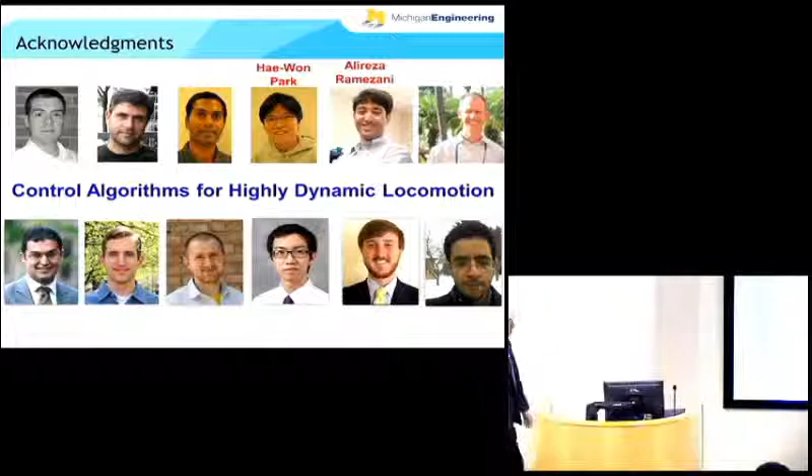Now I want to thank my team. Two of the members that have graduated and got on to great things are here, Ali and Hae-Won. So one of the great things about being in a fabulous Big Ten school, whether it's Illinois or Michigan, we're always arguing back and forth, is the quality of the students that show up. And it's seen here in the group in CSL for sure. But I also want to thank Jonathan Hurst, who's been a very close collaborator of mine. I started working with him when he was a PhD student at Carnegie Mellon. He's been designing robots.

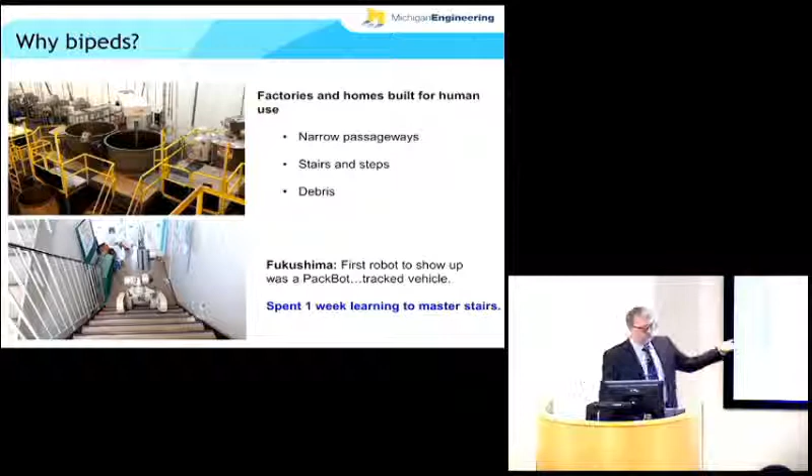Okay, so just a few quick comments on why do we care about robots. Normally you don't have to say anything, we just do robots because everybody loves robots. But in terms of bipeds, I get asked a lot why don't we just use a quadrupedal robot to go into a factory or a house? Why send bipeds? Quadrupeds don't fall down near as much as a biped. Well, the problem is our homes and factories are built for upright, narrow machines, organic or not. So either we redesign all the factories such that something like Big Dog could go up the stairs, or we have to make our robots stable enough that they can operate in that environment. When Fukushima happened, it was an American robot that showed up one week after the disaster, and it took them one additional week to train the robot to go upstairs. So that's not acceptable. We want them in our homes, and of course we wouldn't want tracked robots going in many places in our homes.

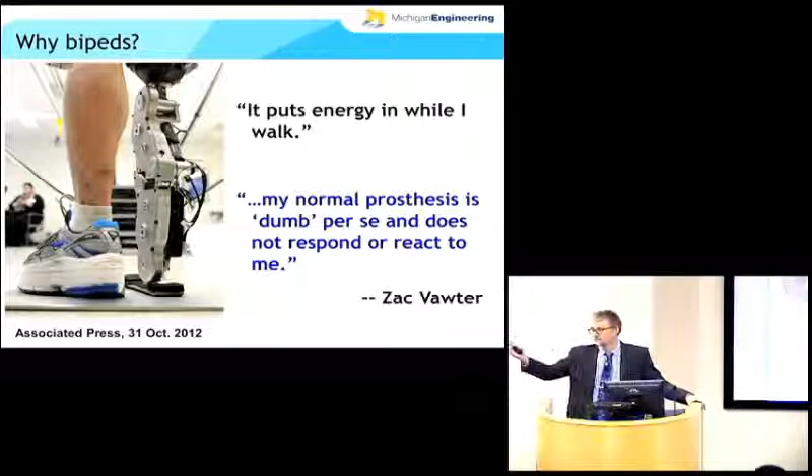If you've had the misfortune of an accident, you don't want to replace that with a wheel, so you're going to have a lower limb prosthetic, and they are now just as advanced as any leg on any robot. And then finally, I've proven lots of theorems in my life. I see lots of people in this room who've had that pleasure as well. And nobody comes knocking on your door and says, I want a tour of your latest proof, okay? What they want is a tour of the robot lab, and it's really a lot of fun. So that's why we do it.

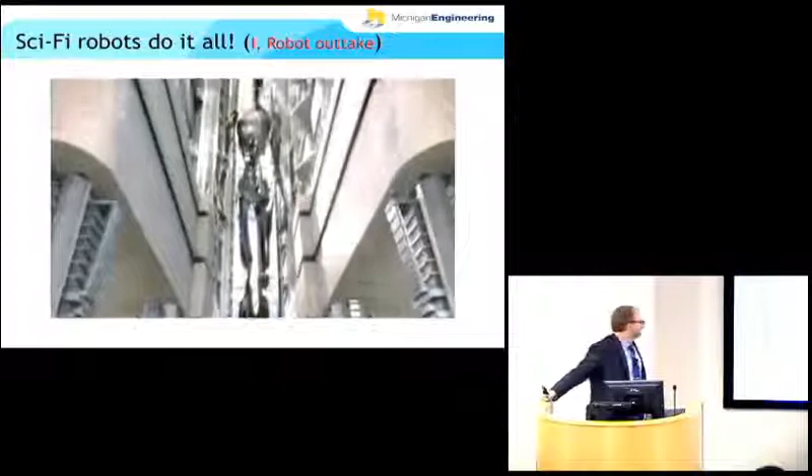Okay, so I had this funny title, Science Fiction to Science Fact. So let's just look at the state of the art. What do I deal with when people come to my lab? What are their expectations? It's based on TV, right? And these science fiction robots are better than people, better than anything you can imagine yet getting a machine to do. So what's the reality?

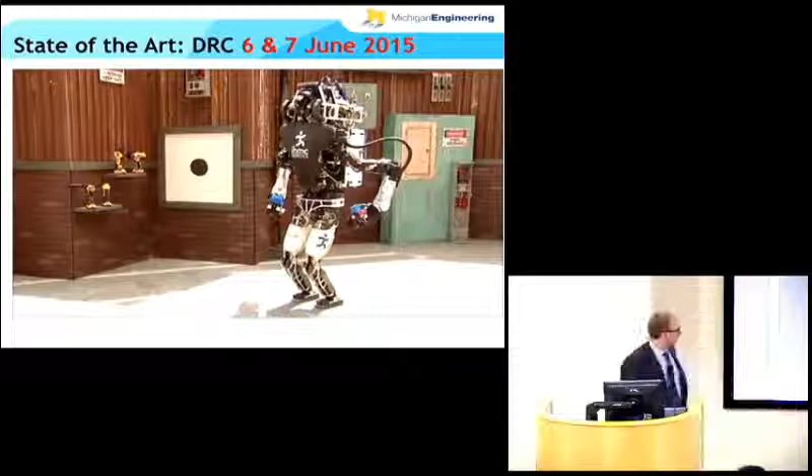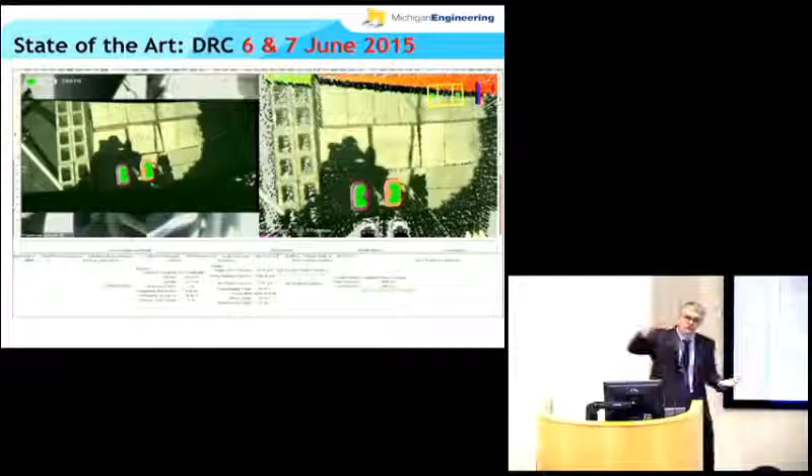So this is a DARPA Robotics Challenge. Why are you guys laughing? That robot won $1 million. Nobody here wants a check for $1 million? It's the only robot that had no wheels or tracks on it at all that actually won money. So it's the only true biped. But you can see it's still very clumsy. Literally, in Jerry Pratt's group, humans were deciding where the robot put its feet when going over these obstacles, okay? So the robot's not doing any of the planning. It's like the Wizard of Oz - you pull back the curtain, and that's what's going on. And how's that going to work out for you, big boy?

Not so well. So obviously he did much better on Sunday, and that's when the robot won $1 million, came in second place. Very impressive.

Was it on the same base ground? Yeah. They practiced on Friday with nobody watching, and then they did the competition twice, and you got to take your highest score. That's how it worked, that was the scoring rules. So they learned a lot on Saturday, apparently, and Sunday did much, much better.

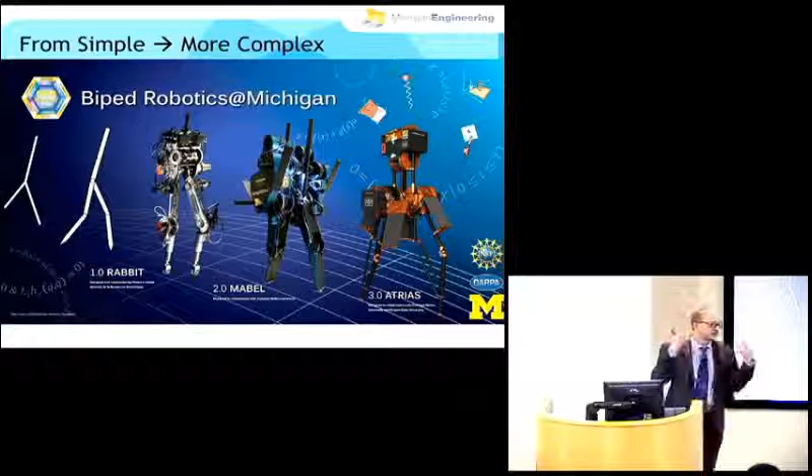So these are robots I've been working on. They're not nearly as sophisticated as that humanoid, but in some sense they're much, much better for doing science. I started just drawing down very simple models, doing nothing but theory until this French robot Rabbit was built. And then we went on and got robots in our own lab. But what I've always been focusing on is trying to get dynamic locomotion, things that move fast and respond well to disturbances.

So here's Rabbit. This is really old stuff now, this is like 2003. But it's carrying a weight that's not modeled, handling disturbances in a reasonable way. Rabbit was a gold mine for proving theorems and developing fundamental notions of locomotion. It's because it was simple enough that you could start making progress. If I had started with something like I'm working on now, quite frankly, I would have just given up.

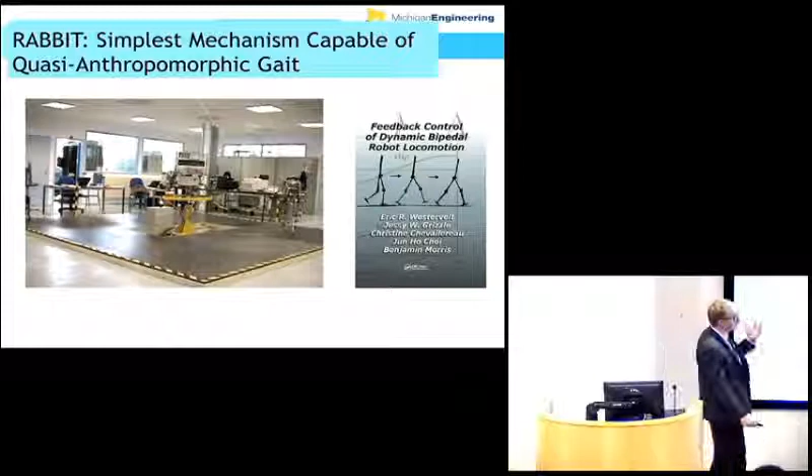It's just too hard. So this is Mabel. The idea was to build a machine that's much more capable than Rabbit, but yet still something that we could then build on from the theory we had with Rabbit. Like Rabbit, it's attached to a boom. And I always get this question, is the boom holding up the robot?

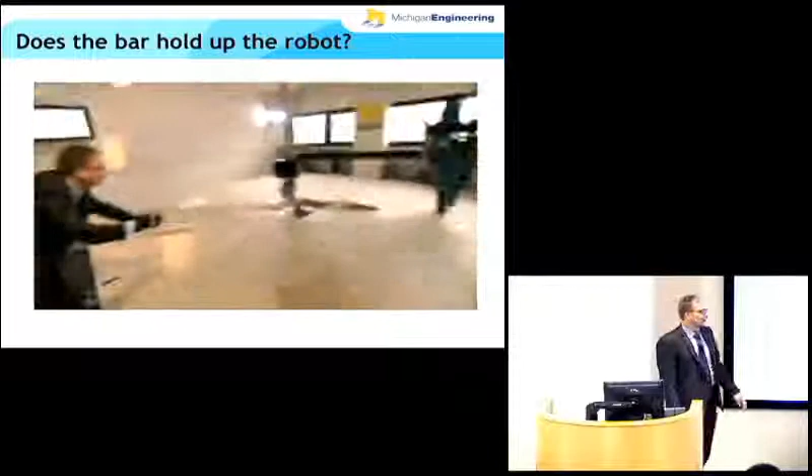Because 3 days later, the robot's on an operating table, and he's got an electric saw in his hand, and he's cutting the robot in two. Turned it into an industrial wasteland for a while.

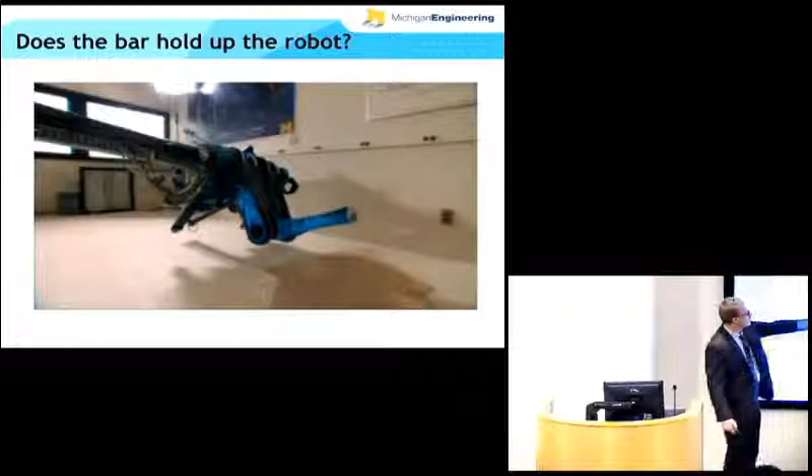So the boom doesn't hold up the robot, but it's designed to be highly dynamic. So there's Jonathan Hurst, the builder of the robot, exercising the springs. It can act like a pogo stick.

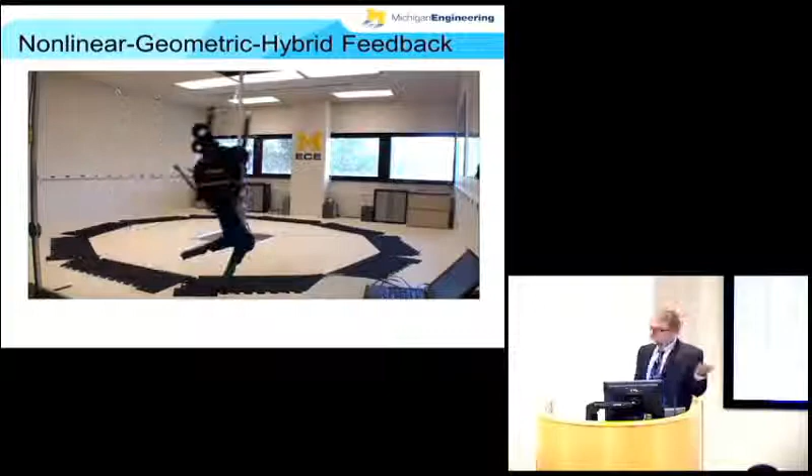And so with that, this is what Koushil did. The top speed it reaches is 3 meters per second, so it's equivalent to a 9-minute mile. So many of you can outrun it, but the robots keep on coming, man.

That was our first video to go viral. People like robot blood and gore. But we're always trying to challenge the machine with uncertainty in the environment.

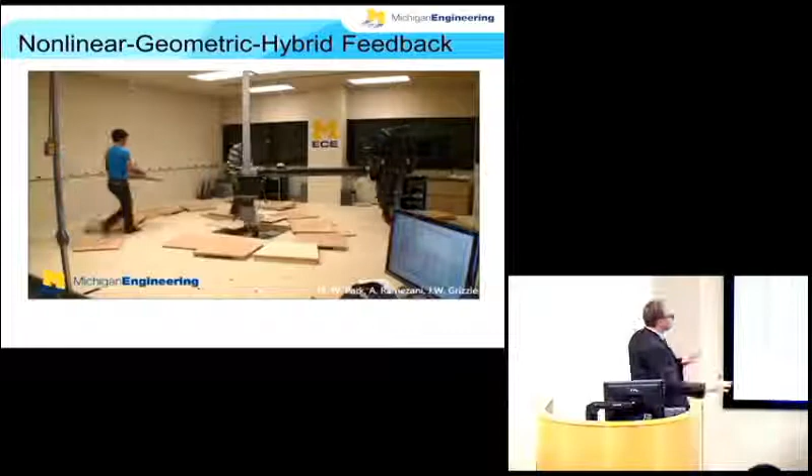That's what we want, we want theory that others can use. It should be transferable to broad classes of robots, and I'll talk about that more at the end if I don't spend too much time having fun on the stuff before that. But we want theory that works in the lab, with, of course, we don't have models of all of this, right? So it has to be robust.

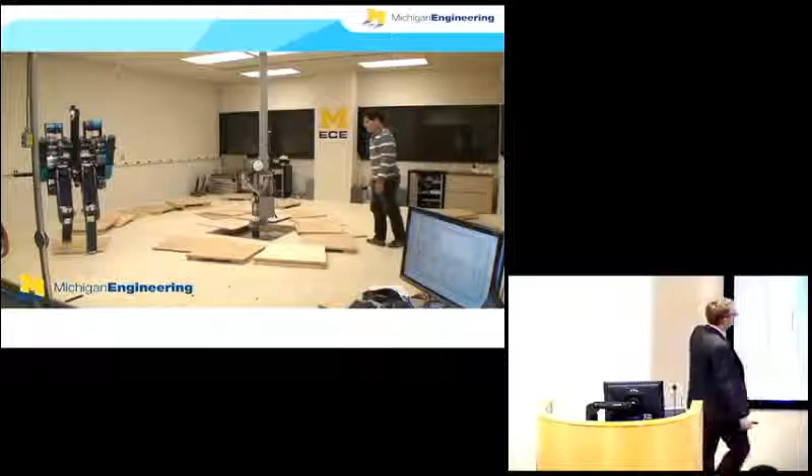Now, when you see this, the big thing everybody was telling me for years, and something I understood too, is that eventually it's got to go, right? It's because if you want to get robots outside, they can't have booms, and so Mabel was retired. She was on display at the Field Museum in Chicago for about 6 months, and now she's on tour, and I don't even know where she is in the U.S. now. But definitely robots outdoors.

And so Jonathan had completed his degree at Carnegie Mellon after building Mabel. That got him a job at Oregon State, and then he, as PI, led a couple of us on a DARPA grant to get money to build a 3D robot. And so where Mabel's legs could not move inwards and out, so there's no sideways motion. So if you're falling sideways, you've got to step sideways. That's what the boom handled.

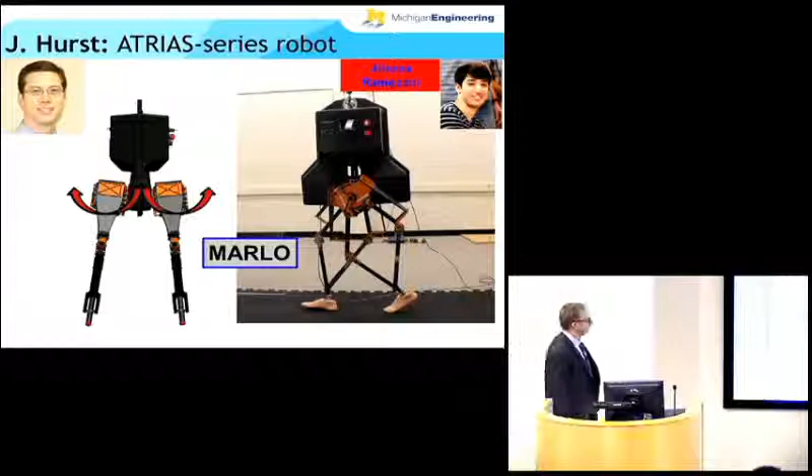This robot can move its legs sideways and do its own stabilization. So the first student to work on this robot was Alireza here. And so, yes, I'll show you more later, but it's quite capable of stabilizing itself, and it's got a pretty natural motion. But you can see, we're terrified it'll fall and break itself, we've got cables on the roof there.

Quite normal. Okay, so what I want to do now is go through some of the model-based feedback design we're doing. Any undergraduates here? Few? Are you feedback specialists? Oh, maybe I don't need this next stuff then.

What's a feedback loop? Here's my take on it. So here's our system, we need some means of having the parts move. So we have motors attached to links and something to measure what the robot is doing.

So we're using encoders, and there's also an IMU to get the orientation of the body. No cameras or anything like that.

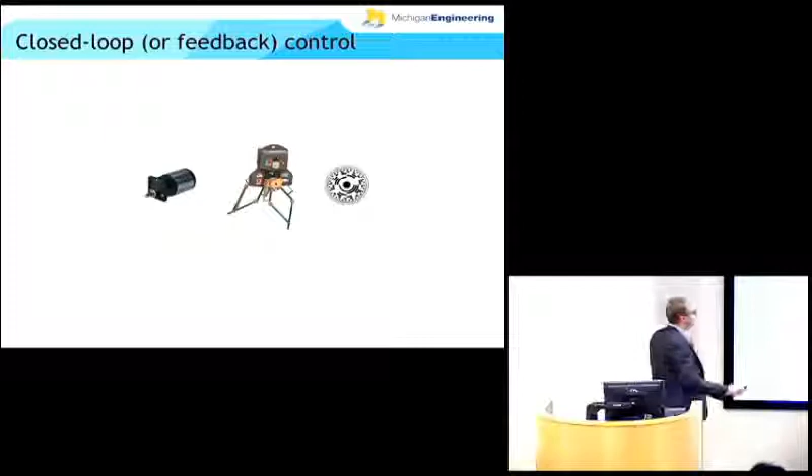So that's our system. What we want to now do is come up with an algorithm that takes these things as inputs, using the measured quantities, forms a sense of balance for the robot. So that's what we want to have, is stability. This kind of grace that you saw in the running, the ability to handle terrain variations, etc.

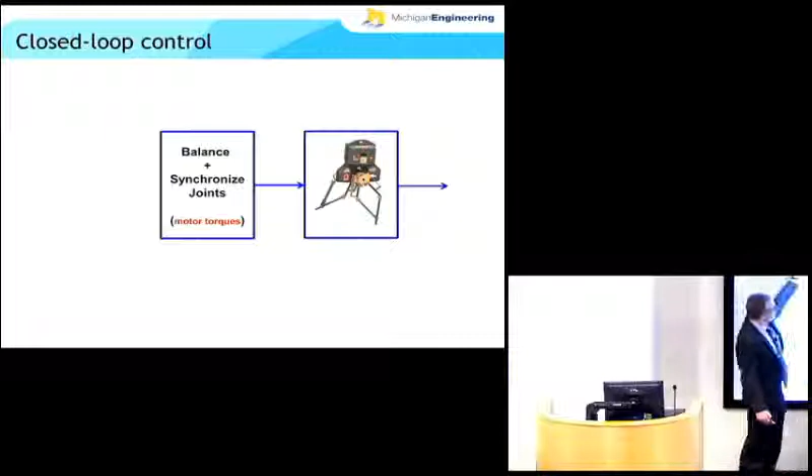That's what we want, so that's our feedback loop. And then it should also take the reference commands. We should be able to tell the robot the kind of actions we want. Should it be walking over the terrain? Should it be running over the terrain? Maybe we want to give it some feed-forward information, like there is a big slope up ahead, even though if you don't have a camera, we'll just tell you, whisper it in your ear, okay?

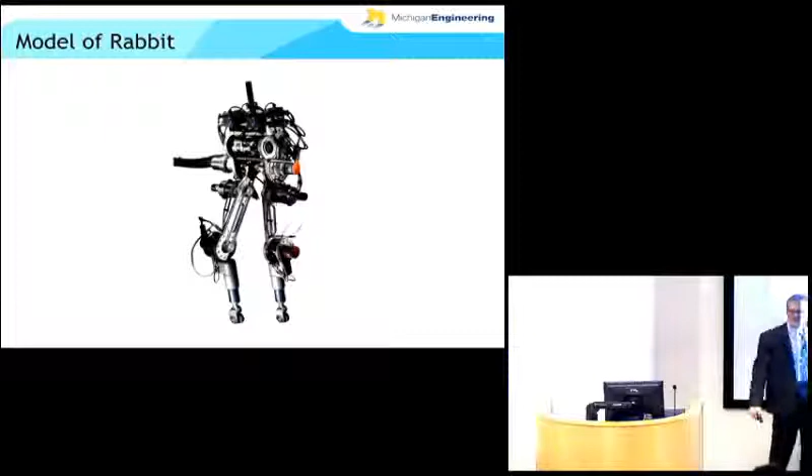The other part of the models, besides just the huge size that you wouldn't typically do in a homework problem, is that they have multiple phases, and they're called hybrid. They have switching aspects in it. So in single support is when you get these Lagrangian dynamics that I was just playfully having fun with you with.

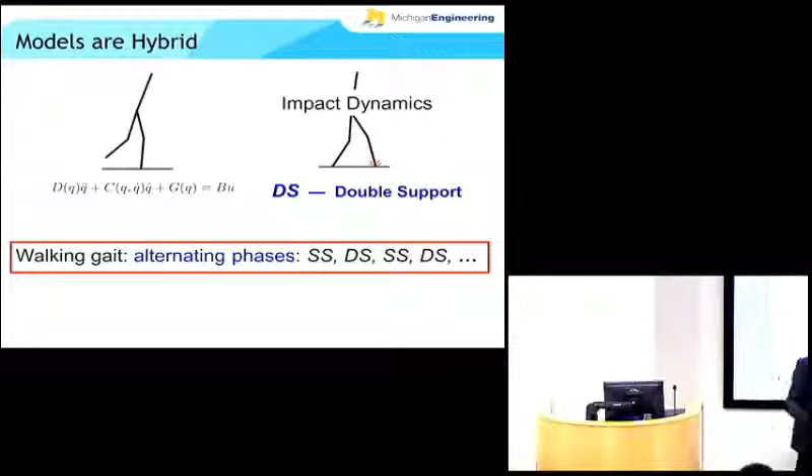But then when the swing leg comes forward, it decelerates very, very rapidly. It takes about 20 milliseconds. And so we model that as being instantaneous. And the reason we do that is if we put in a compliant model of the ground deforming, we'll actually introduce more parameters trying to get the spring constants and the damping in that we surely don't know, and surely changes when we're walking on this carpet versus walking on the sidewalk outside, so that what looks like making the model more complete and more certain is actually introducing garbage into the model.

So we're better off with this simplification of an instantaneous impact, and this gives us a hybrid system with continuous dynamics, switching, a new initial condition, relaunch the dynamics. Okay, so that's the models. They're hybrid and they're fairly big dimensional.

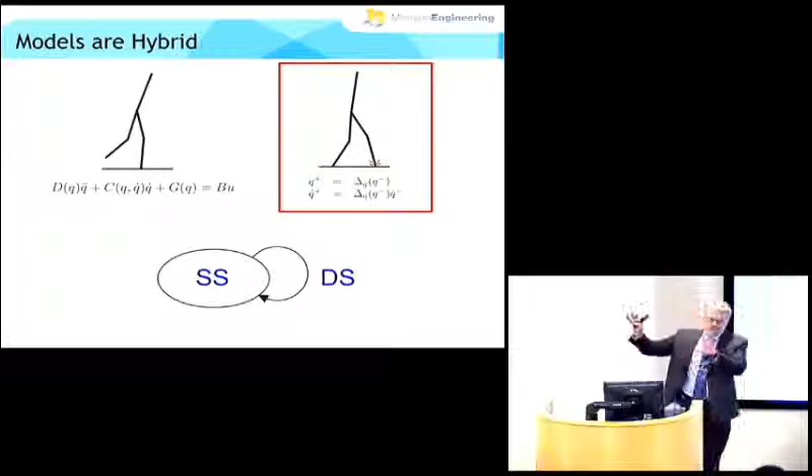Let's talk about another piece of at least the robots I work on. Rabbit had no feet. Mabel, 99% of the time, had no feet. And we put really simple feet on this one, but they're unpowered. So why do I do that? So that's how robots were walking when I started in this field.

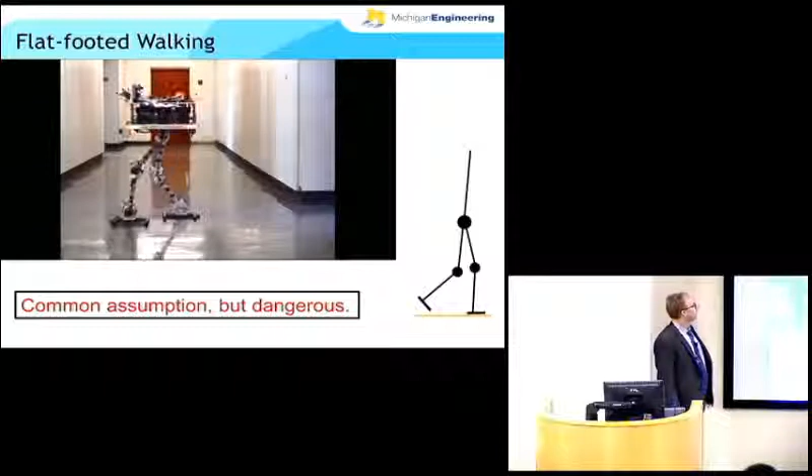Really slow on big feet. This is not good walking. That's SCHAFT. Anybody recognize where that robot placed? It won the trials that was before the DARPA robotics challenge this past summer. So that was the first place robot for doing the preliminaries for the trials. That's how it walked. I mean, it's fantastic flat-footed walking, but it's just walking just the same as that robot was doing 20 years before that, okay?

And so there's all kinds of theory. 95% of it works when the robot can maintain flat contact with the ground, because then if you have big, powerful ankles, et cetera, you can orient the shin, and with the knees, you orient the thighs, et cetera. And the problem comes when you break that assumption, and it's really easy in 3D when the feet are narrow to roll side by side, okay?

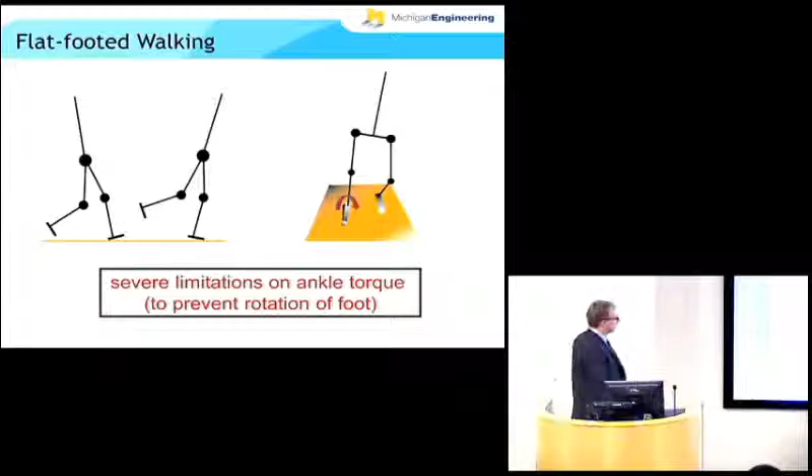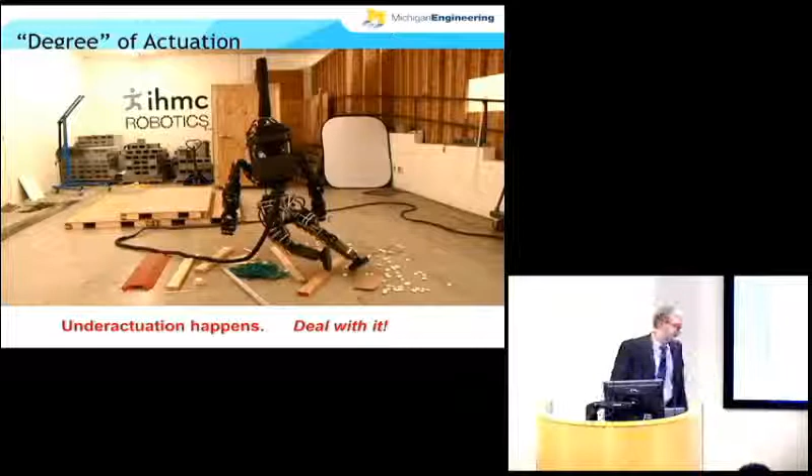A little bit of math, and then we'll get away from the math again, and we'll come back to the math in the middle and then go back, okay? So if you have one of these hybrid models, how do you find a periodic solution and check whether it is stable? In the sense you perturb it, you converge back to it. Okay? So what we do is use the method of Poincaré. It's old, just like Fourier.

So this is a set of points on the ground, in the state space, where the robot's front foot is flat on the ground. You take a point in that, follow it around with the impact map, so go boom.

Now apply the Lagrangian dynamics to it. Whoops, went the wrong way. Okay, you will come back, not necessarily to where you started, but this gives you a map from this hypersurface to the next point, and that's called the Poincaré map.

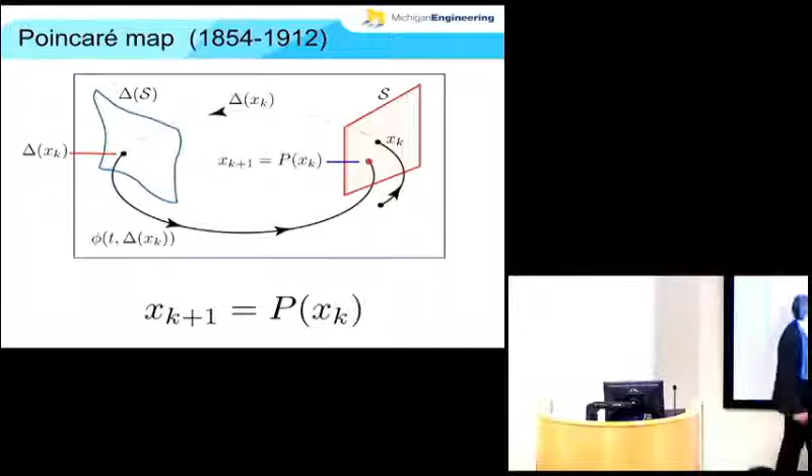Now, if this point lines up with this point, guess what you have? You have a periodic motion. You found it. So equilibrium points of this discrete time system are called fixed points of the Poincaré map, and they are periodic orbits in the full hybrid model. That's how you find those.

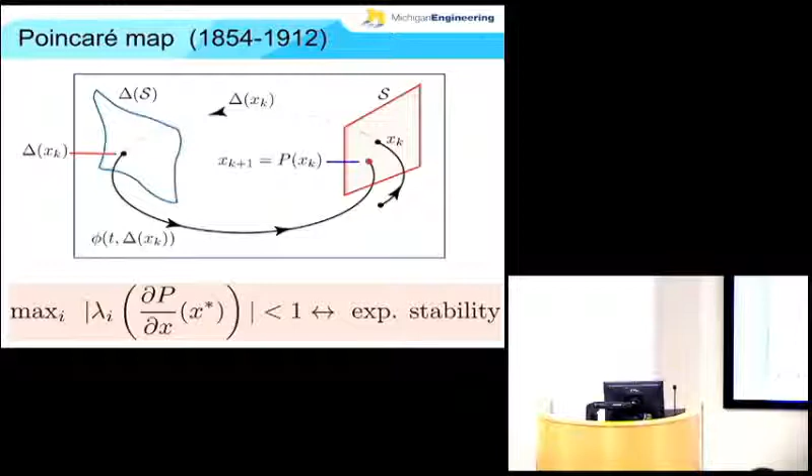And then just the same way you check stability of a discrete time map, you look at its Jacobian, you check the eigenvalues are inside the unit circle, then you have local exponential stability. So you'll have a tube about this trajectory guaranteed, by proving there's an attractive region on this reduced set. That's the beauty of the Poincaré map.

Okay, everybody with me so far? Am I speaking too fast, or we're good?

Okay, so we'll give you the idea behind what we do. We'll have a little fun with it, and then we'll come back to some experiments.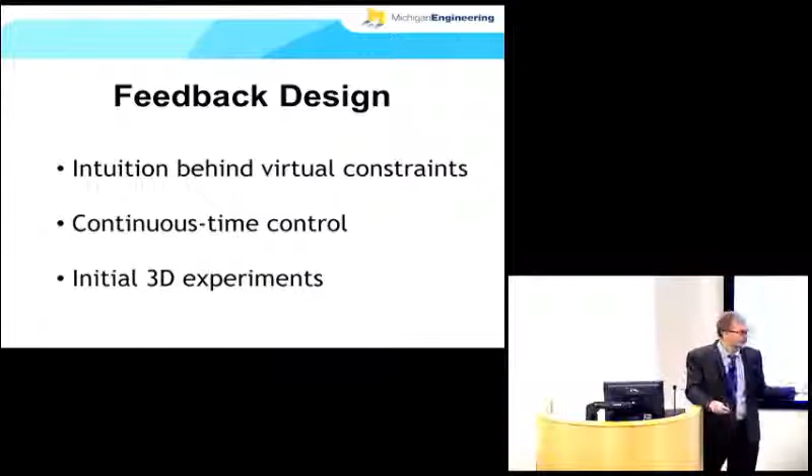I do something called virtual constraints. The way I like to explain it is to use notions from kinetic sculpture.

So this is Theo Jansen. He doesn't know who I am, and I know who he is - that tells you the relationship of force here. But he came to the Michigan campus and gave a really nice talk, and that's where I discovered what he does. He builds these really complicated mechanisms.

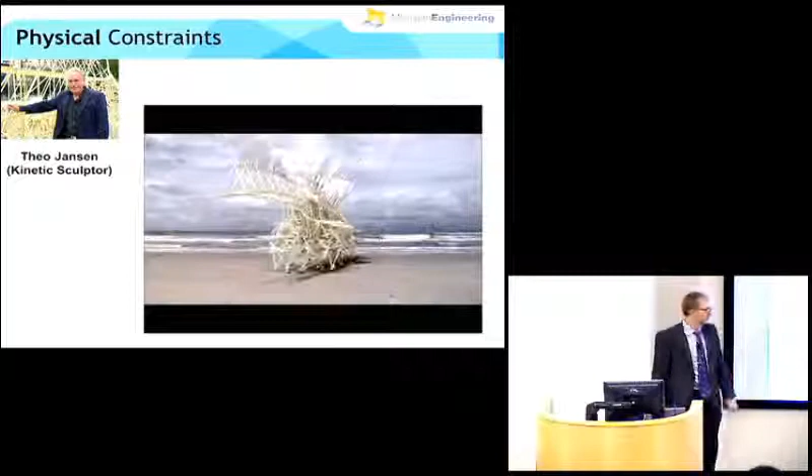And this is how they work. So there's a central crank going down the mechanism, to make things that look so close to being alive. This is one of the beaches of Holland where he's turned these things loose - he calls them Strandbeests. Go on YouTube and look them up, they're thrilling. So there's a crank, and even though he's got dozens and dozens of legs and hundreds of links, everything is synchronized by this one variable moving. So fundamentally, it's 1 degree of freedom.

How is that happening? It's because he has all these physical constraints that are doing the synchronization for him. So what we do is take this idea and use it as a programming method. Let me tell you what that means.

So you could use basic high school trigonometry and write down all of the angles of the various knees and hips and whatever you want to call those joints as a function of the crank angle. And so Theo Jansen's choice of the lengths of these various bars gives you sine, cosine, inverse, arctangent, whatever here.

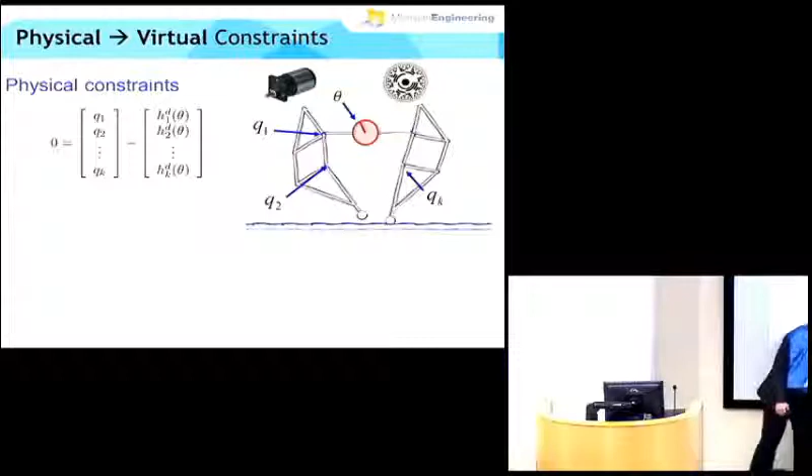Now suppose you disconnect the things from the central crank, and you add motors and a way of sensing where things are, and then you give yourself a feedback problem: drive the error from what the physical constraints would be doing as these functions to 0 asymptotically. Then you will have imposed this relationship with feedback control.

So physical constraint - this is virtual because it's MATLAB code. Theo Jansen, to change his gaits, has to go to Hacksaw and reglue all these things together. And for us, we just change lines of code in MATLAB. It's that simple.

So that's what we do. There's a crank. Where's my crank?

So if you look at the line connecting the hip to the stance toe, it's a hybrid clock. It's monotonically increasing as long as the robot's walking forward, and then it resets each gait. So this one goes round and round, so it's got continuous, or on this circle, but we're just going part way and resetting, and that's what we have.

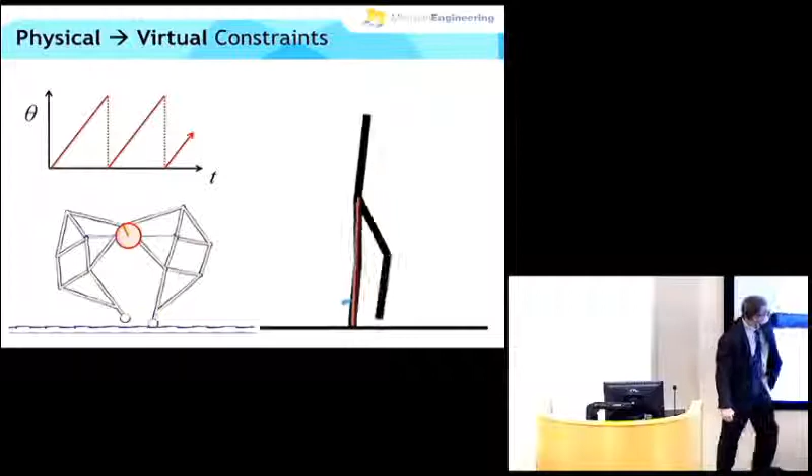So we use this as our crank angle. And so then what we're doing is we program up a gait by programming the knee angles and the hip angles as a function of this virtual crank angle. I'll have to tell you a little bit about how we choose those functions, because that tells you everything about the gait. And so here's us.

So Ollie and Brian and I are at Oregon State. We've been working with the robot for 2 days. We now figure out all the motor controls, all the sensing, all of Jonathan's coordinates, all of our coordinates, and we've got the virtual constraints implemented.

And all the students are doing is moving this angle forwards and backwards, and you can't tell if there's a whole bunch of gears and funny things in there moving the leg or whether it's a computer program. It's the same thing as far as you can tell with this playing out. So is it MATLAB code, or is there really gears inside the robot making that happen? That's the notion of virtual constraints.

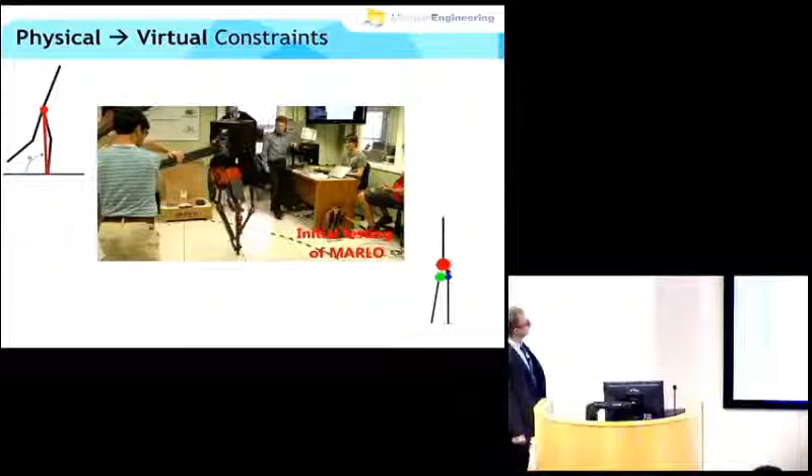Okay, so this is how we write them. Things you are controlling, knees, hips, etc., their desired evolution. And then you have this gait timing variable, or the virtual crank variable, and you use feedback to drive them. There you can do inverse dynamics, you can control Lyapunov functions, you can do MPC. I don't care how you impose those constraints.

All I want is that this is asymptotically assured. Now, often I talk a lot about the geometry and et cetera.

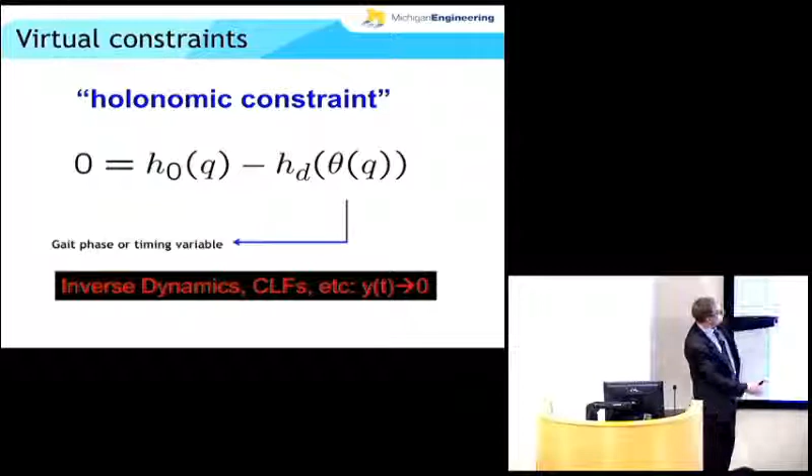Today I'm just going to do a few little pictures, but constraints give you invariant surfaces. So these constraints translate into relationships on the state variables of the robot. And so it's moving on a much lower dimensional surface, which Byrnes and Isidori studied in their fundamental work in the late 80s and early 90s and called the zero dynamics.

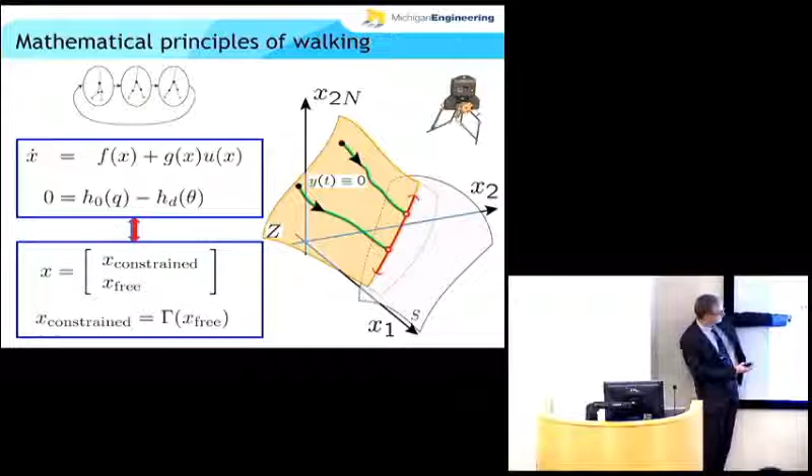And what we've done is take that into the hybrid arena that shows up in robots, and we make these surfaces also invariant under the reset map, and then we have these hybrid zero dynamics. And that's kind of my thing, hybrid zero dynamics.

But why I love them is, you see, like on my robot MARLO, there's 6 actuators. So I have 6 of these and their velocities. There's 12 states that I know exactly what's going on almost. I mean, the actuators are tied directly to them. So all the uncertainty in the model, I can use my actuator power there very effectively.

And then I have anywhere from 4 to 8 states, depending upon my springs and a few other things, okay. But I've at least divided the model dimension by half, but usually I'm removing at least 2/3 of the model.

And it's the choice of virtual constraints that shapes this surface over here, and that's what gives me the inherent stability of my action, is designing this surface correctly.

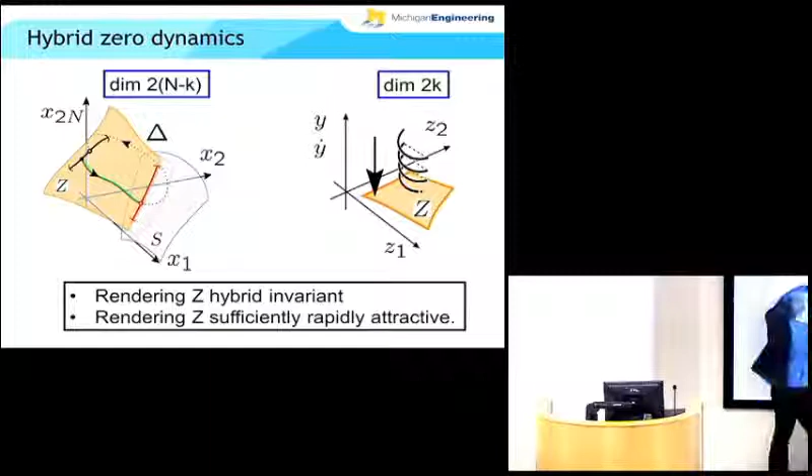Okay? So if I design this surface correctly, and then I use any method I want from feedback control to drive myself to that surface, that's the inherent method that I'm implementing. So it's a divide and conquer, and they look separate, but it's the choice of virtual constraints that makes this the right thing to render attractive and invariant in the closed loop system.

Okay, so let me tell you a little bit of how we design those. So once again, I said it before, this is my error term. I want to make this small. These are the things I'm controlling, knee angles, hip angles, but maybe something more elaborate.

Then I've got this function, and what I've done here now is introduced a set of parameters. So these are splines, and I'm going to choose the splines to set the shape of this surface, how the swing leg rises from the ground, etc. Okay? So I'm going to set up a problem, a design problem, of now I'm really designing the virtual constraints.

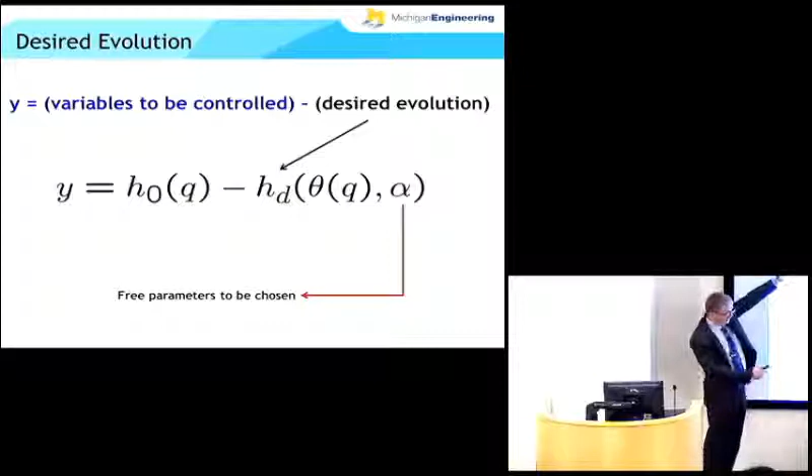And so what we can do is use some good old nonlinear control theory, and we can determine the torque it takes to move along one of these surfaces. And so what we do is minimize energy required to move on the surface, divided by distance traveled.

Okay, so this is cost of transport, and if you normalize by gravity, this is some nice dimensionless quantity. We set up a little optimization problem, and then this is where everything matters.

It's all in these little constraints here. Okay, so the constraints, my actuators only have this much power. I have a friction cone depending upon what I'm walking on that maybe is 0.6 if I'm lucky, but if it's on a slightly icy day outside, it's maybe 0.3 or 0.2.

I don't want to be stomping on the ground and breaking things, so I want to limit the velocity of my feet at impact, etc. Okay. I want to walk at a given speed. Maybe I want a periodic behavior, or maybe I want to transition from walking, as you saw Mabel, into running. Okay, so all of that's in there.

If I know the ground is mostly flat, my swing foot clearance will be really, really low. You guys do this all the time. Outside my office it's nice linoleum and flat, and every once in a while that linoleum kicks up a millimeter, and I can just watch people trip on it all day long. That's how efficiently we walk indoors. And if you use that gait walking on the sidewalks at Michigan or in Urbana, you'll just die.

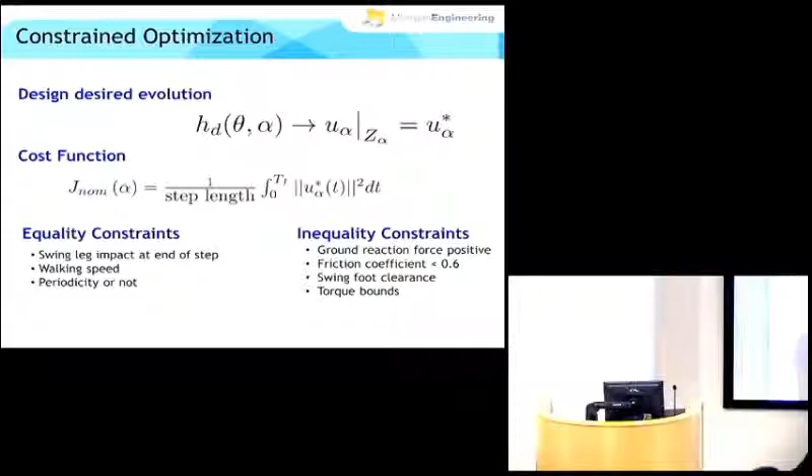This is where all the engineering judgment comes in, and then the optimization finds magically how the knees and hips and everything should evolve so that this can happen, or it says there's no solution. It'll say, sorry, with only 3 Newton meters of motor torque you cannot go at 1.4 meters per second walking. It's just not going to happen. Give me more power. Okay, so that's how we get the beautiful constraints that you saw.

And now let's talk about stability. So this is where choosing what to control is kind of important. So let's look at the planar case.

So this is Rabbit. I could control the angles of the knees and the hips like I've been talking about. Why not? I could have a more world frame point of view: the height of the swing foot and maybe its path, the angle of the torso with respect to the world frame, heights of the hips with respect to the world frame. These are all body coordinates; these are all world frame coordinates. Very different, right? So you'd expect that one choice versus another should give you different stability results.

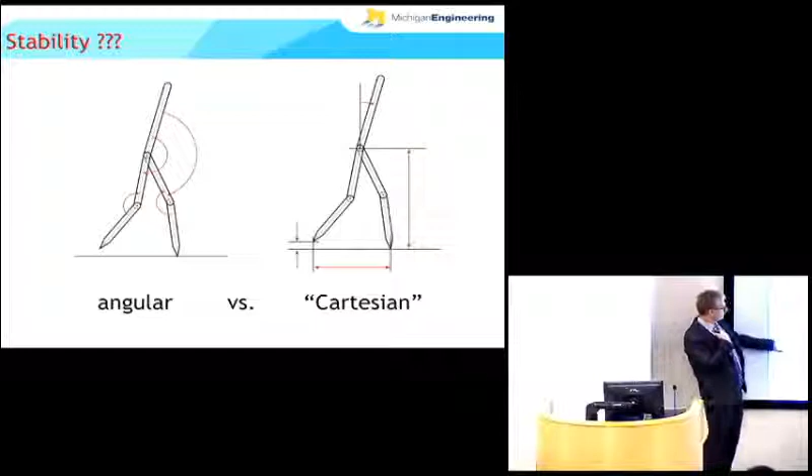This was a surprise when we discovered this. If you have a robot like Rabbit or Mabel with stiff springs, you have 1 degree of underactuation. Stability is independent of the choice of outputs. Completely independent. The orbit is the only thing that matters with this method of control. Completely doesn't matter.

What's important, though, is that stability is kind of a minor thing. You might want bigger or smaller basins of attraction and how you respond to disturbances. So even this result is true in the sense of stability, but it's not true in the sense of, hey, all outputs give you the same basin of attraction and how much torque it takes to recover from a perturbation to the periodic orbit.

And what's really sad and drove us nuts for a long time is that as soon as you remove this 1 degree of underactuation and you go to robots like MARLO, where you're balancing in 3D essentially on a foot, and so you can pitch, roll, and yaw, that's 3 degrees of underactuation — oh boy, does output choice matter. And that drove Ali crazy as the first PhD student working on this.

So let's see how that works out. So here's a 3D robot, and the obvious thing to control on it are the knee angles, the angles of the legs with respect to the body, and then since in 3D you have these extra coordinates which involve moving the legs in the frontal plane. So those are the actuated coordinates. And that would be really how we thought about Rabbit here, or MARLO for that, Mabel for that matter, and then adding some ideas of doing things in 3D.

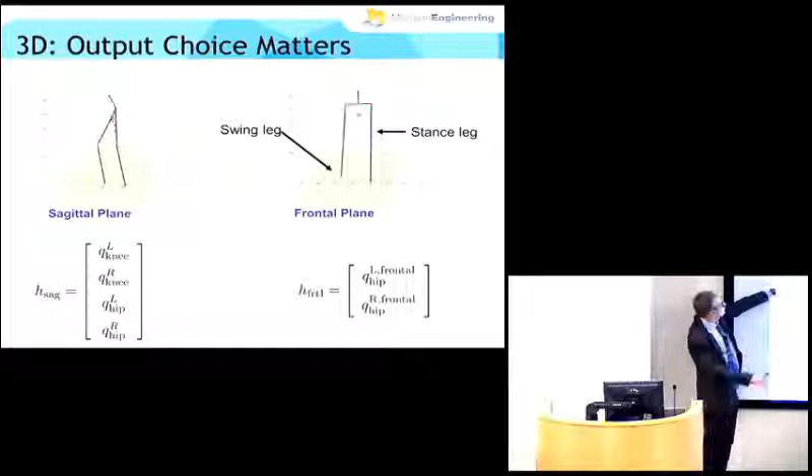You do our beautiful virtual constraint design. You calculate the eigenvalues of your Poincaré map. That's bigger than 1 in magnitude, outside the unit circle — robot falls.

So this is what made me really proud for a short period of time. Working with Christine, et cetera, I kind of figured out, hey, I get it. When you're falling over, the leg needs to come out, keep the center of mass between the 2 feet. So I'm going to control the horizontal displacement in the frontal plane as a function of the angle of the center of mass.

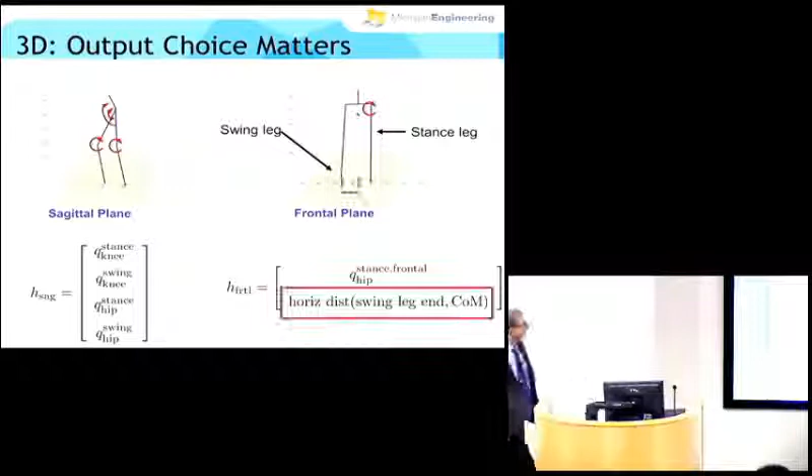So in this particular model we were looking at, hey, I'm a genius, I use physics. Eigenvalues are now inside the unit circle. And I was like, yes. And then we do the same thing on the robot in our lab.

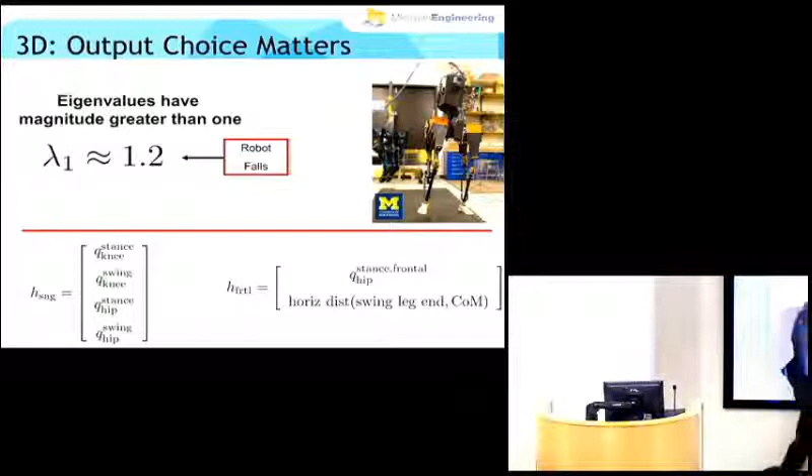And Ali comes and shows me that the very best we can do is 1.2, and he basically has a proof. And I'm going like, wow. So we did some really nice event-based control and got MARLO going. Then after Ali graduated, with a postdoc in Bryan, we took on this problem of systematic selection of outputs, and that's what I'd like to tell you about.

So how can you choose these virtual constraints in order to guarantee stability without messing up the beautiful periodic orbit that you have designed? Okay?

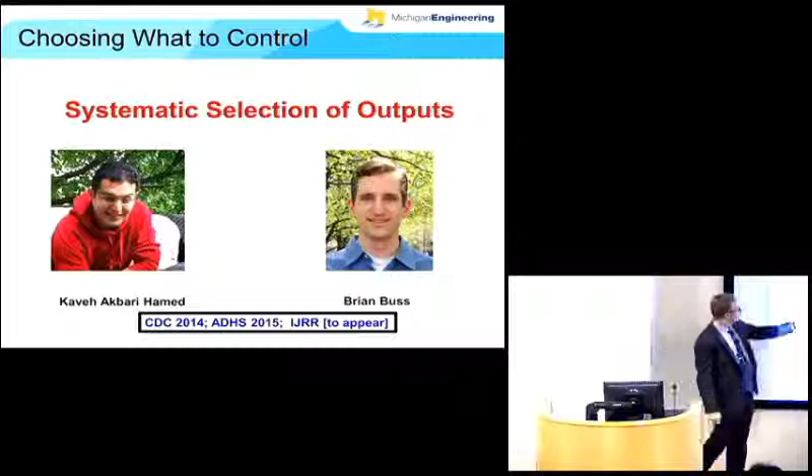So here's the idea. I'm going to show you that you can introduce families of controllers, and they don't change the basic periodic orbit that you've already designed. And then I'm going to show you a formal stabilization problem of choosing these parameters to make this orbit exponentially stable, if there is a choice.

If there is a choice. And then we'd be systematic.

So here's the idea. So we design these orbits by zeroing out these virtual constraints. So forget about this matrix for a second. I design my orbit. I take all of my configuration variables and I evaluate them on the orbit as a function of this virtual crank variable.

So then, on the periodic orbit, this is already identically zero. It doesn't matter what I put here. All I've got to put here is enough restrictions such that my decoupling matrix is full rank, and blah blah blah, some things that are basically generic.

Then now I can change all of these linear combinations of variables in ways that my brain can't process, but optimization programs are perfectly happy to help us do. Okay, so that's what we do.

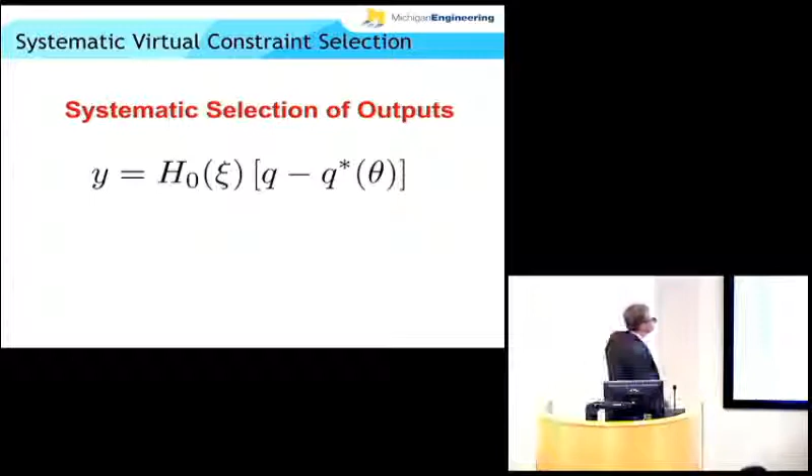No matter what I have here, I give the same periodic orbit, but I won't have the same stability, as I'll show you in a second. But if you like LQR thinking or whatever, this would be closer to the family of controllers that Russ Tedrake uses, for example. But you can do the same thing with his stuff.

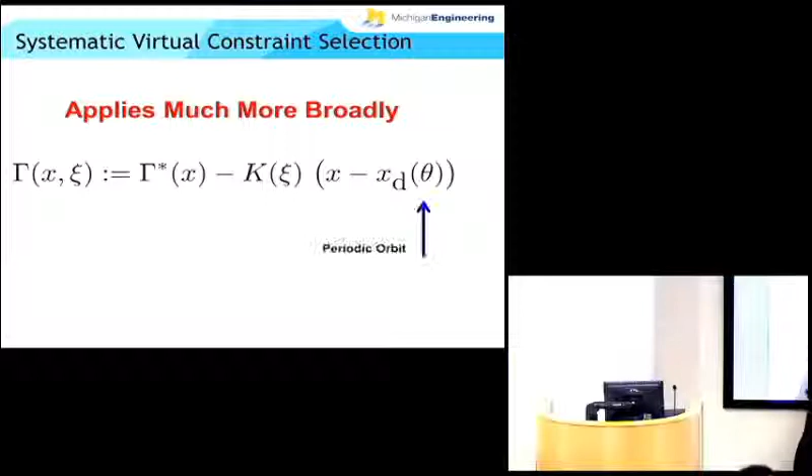Okay, so here's the setting. We've got this crazy hybrid system. We've introduced a family of controllers. We did the orbit design based upon all the limitations that this robot has in terms of physics and what we're trying to get it to accomplish. With the existing set of constraints we did the design on, we might not have stability, and now we're trying to enhance stability. Okay, so here's the picture of what I just said.

So this should be like hybrid, but imagine that we're just doing a periodic orbit and forget about the hybrid thing, okay? This is one of the zero dynamic surfaces, right?

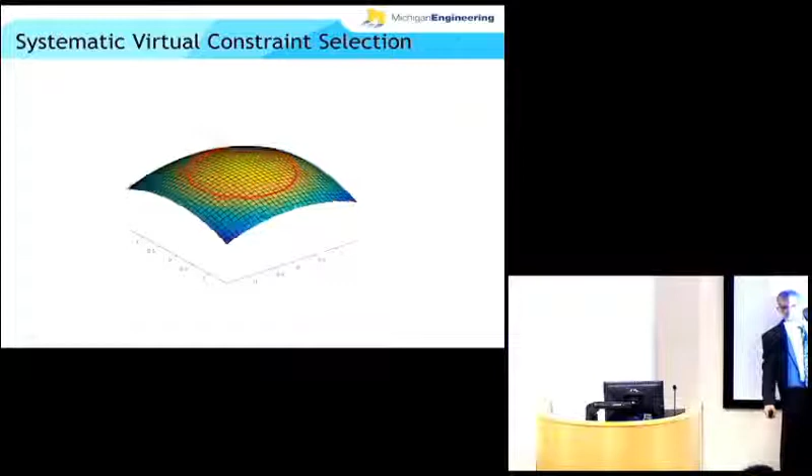As I change my parameters, I'm changing this surface. As I change the parameters, that surface changing changes the directions of the vector fields pointing to it, is the idea. Okay, so if it's really just two-dimensional, then maybe I could just do this by hand and try to make sure that all of them point in, and then I have stability, versus going like that, it's instability, right? But, you know, these high-dimensional models, good luck.

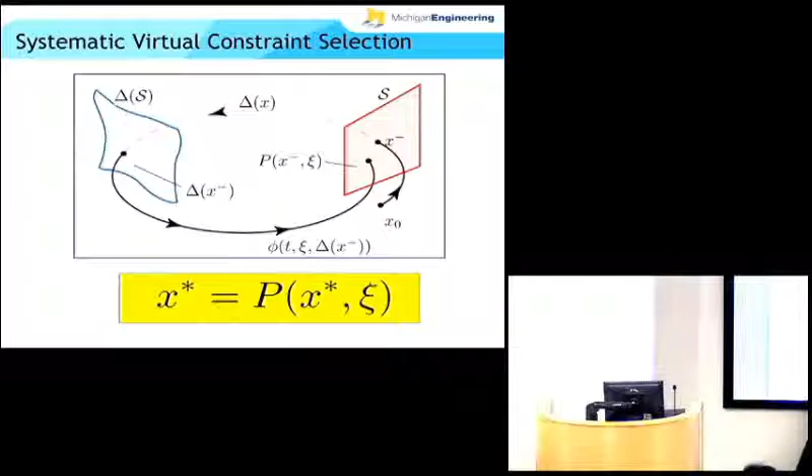So what we do is we use this Poincaré map that I told you about. So because the orbit doesn't depend upon these parameters, this fixed point doesn't vary with my controller parameters, which are changing the virtual constraints. What we want is a value here so that this matrix is Hurwitz, its eigenvalues are inside the unit circle. Okay?

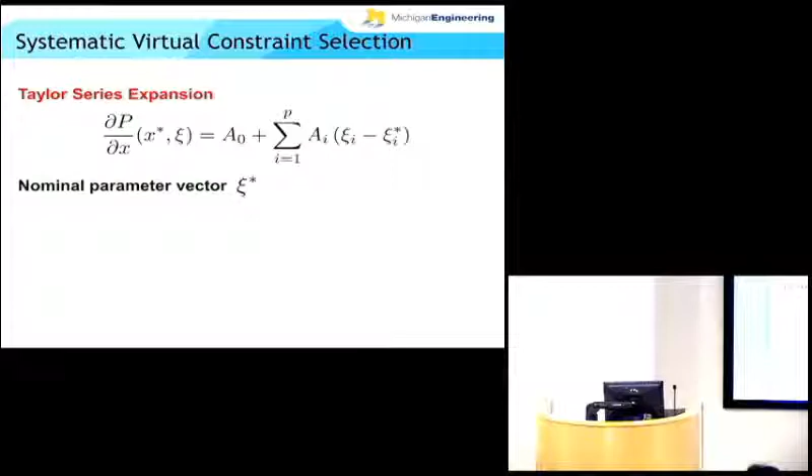So let's do a little Taylor series expansion of the Jacobian with respect to the control parameters, and you'll get something like this. When you're not changing anything, this is your nominal Jacobian, and then these are the next perturbation terms in terms of the deltas that I'm adding to my control parameters. Objective: choose those deltas such that the sum of those matrices is Hurwitz.

Okay, so when I was a grad student, we talked about doing static output feedback control and how that was an impossible problem to measure, and always do dynamic instead and stuff like that. This is actually equivalent to static output feedback, so it should be impossible. But it's not anymore, because of computational tools, and this is why.

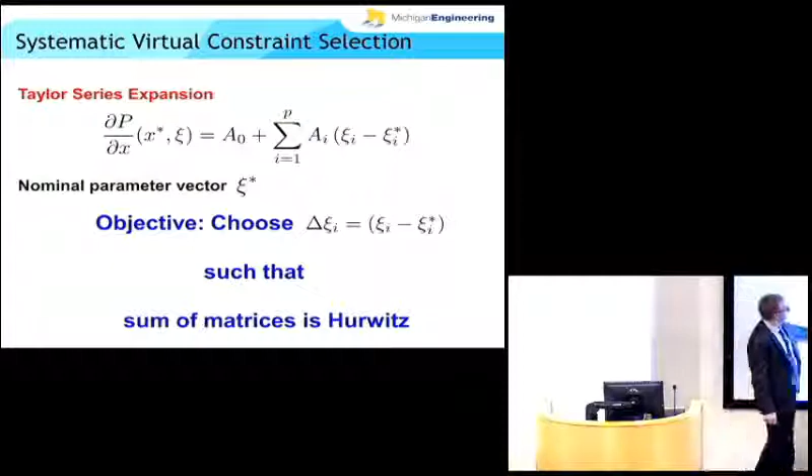Okay, so to be Hurwitz, I can look at eigenvalues, but the other thing I can do is build a Lyapunov function. Okay, so introduce a Lyapunov function, and I want its increment to be negative. If these parameters are constant, checking this condition is a linear matrix inequality.

If I freeze a guess for the Lyapunov function and change this, because it's linear, that's another linear matrix inequality. And when you write everything down, it's now bilinear. So it's a bilinear matrix inequality. It's not convex, so you don't get global solutions, etc.

But it's kind of a, I don't want to say friendly perturbation, but it's at least tractable. And a lot of the solvers essentially work by freezing this, iterating on this, freezing that, iterating on that, and then you can prove that you converge to at least local minima and stuff like that.

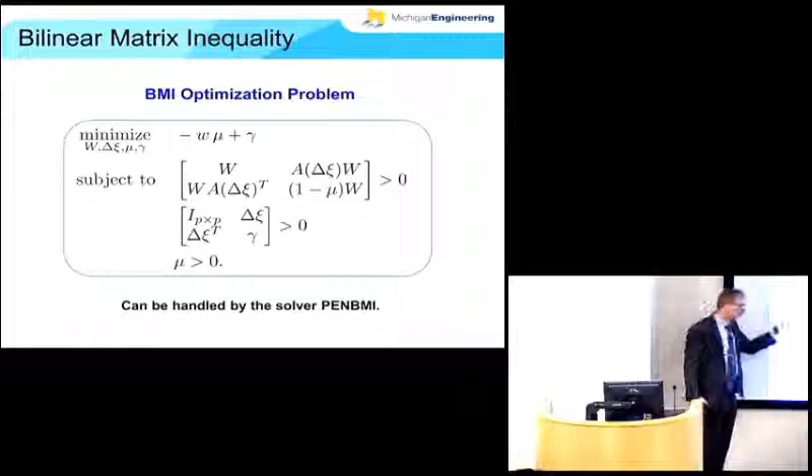The solvers are getting to be pretty darn good. So that's what we do. We did it on this original model where I could use my physics, and then we did it on the robot I really care about, where my physics intuition didn't work. It gives us virtual constraints which depend upon the crank angle, but it also told us how to introduce the roll angle properly into the designs.

And this is what we get. You've probably seen this if you love Michigan football, because this is from the Big Ten network. It's all dark because they're trying to make these really nice things. That's the producer: oh my God, it moves.

Now MARLO is stable without making just a lucky guess of what things are. And with the lights turned on, this robot still works. It's walking on stilts.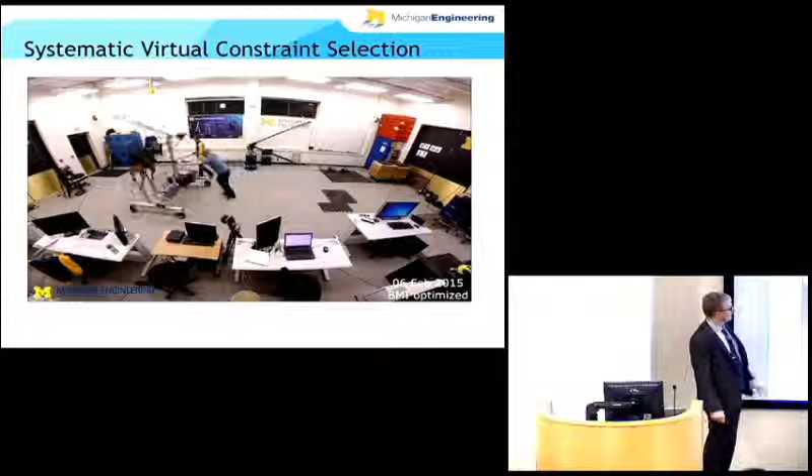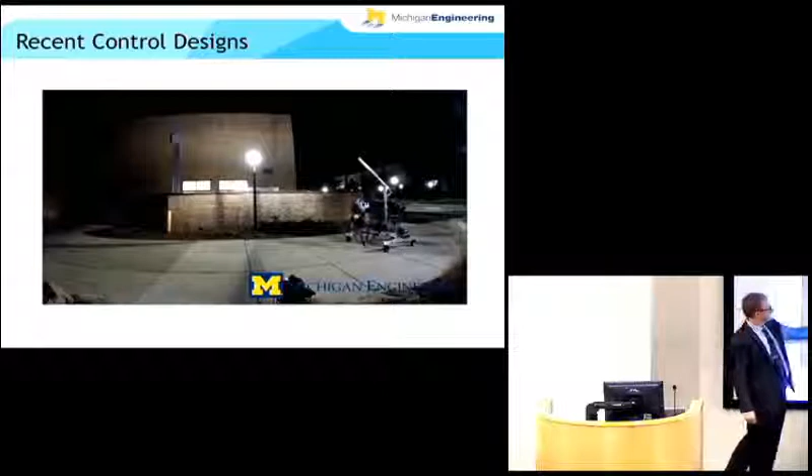Three degrees of under-actuation, etc. More recent look, with Omar and Dennis. We don't use a camera, so the robot doesn't care if the lights are on or off, but it's more fun for us. This is in December. You see we've had a mild winter just like you guys.

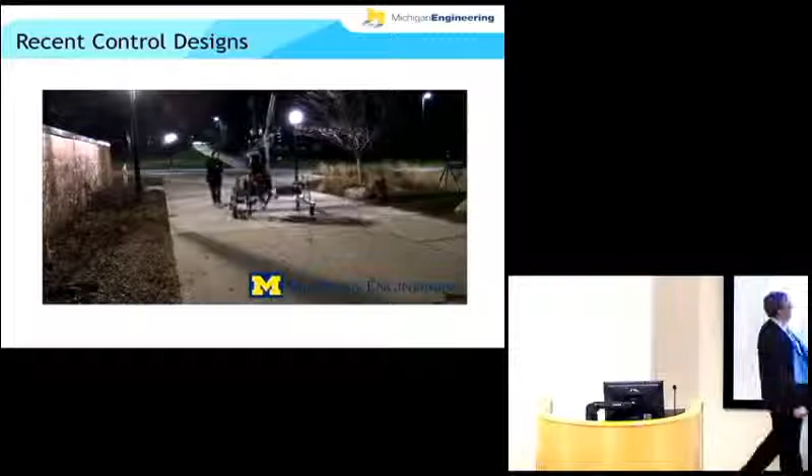We've got a low gain controller hooked up to the robot. We're being very cautious, lifting the feet high, etc. This is another set using non-holonomic virtual constraints and testing them on the planar version of the robot.

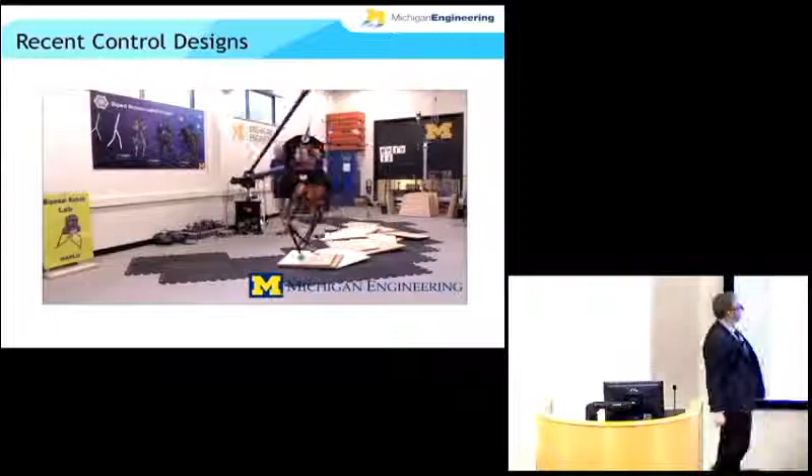This is great uncertainty. And when we can do that without the boom, then I'll find a different problem to work on, okay? Hey, Juan, Ali, it's all yours once we can do that, okay? We can do a little bit. And this robot has a broken harmonic drive when it's walking. It's kind of amazing, it's even standing up.

So that's some of the new stuff we'll be telling you about. Our goal is to be able to go over something like this. If you've been to Michigan and seen the wave field, it's pretty. Just blindfold yourself and give yourself a shot at it, okay? That's what the robot will be, blindfolded. And as soon as the campus police will let us, we'll be walking around and doing all sorts of stuff on the main campus diag.

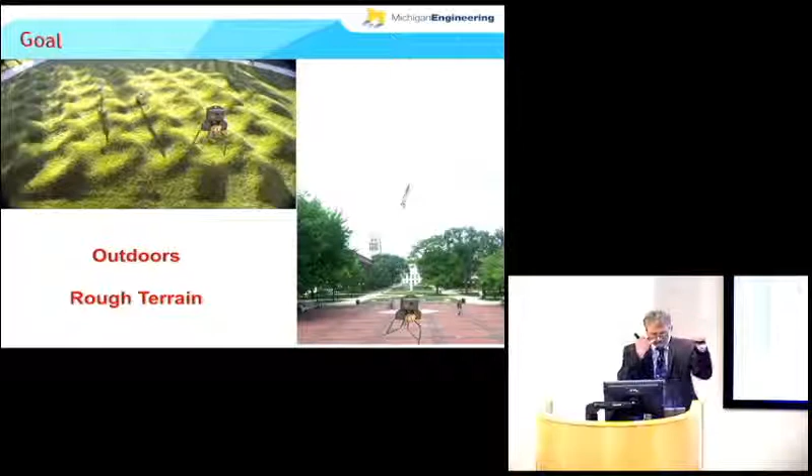But what I want to close with is, why do we do all this mathematics for these machines? Because the people who just get their machine and use all of the intuition and hacking to make that one machine work, they always beat me to getting something done, okay? But the problem is they don't leave a recipe that I can follow or someone else can follow, okay?

So my group is slow, partly because I always keep it small and I like to interact a lot with people. But we're after general principles. And what's really gratifying is that when you get the right papers out and the right books out is when other people pick up the work.

And what they do is they send you a video of your stuff in action, and there was no phone call saying, what was the special sauce? What did you really mean here in this equation? You get it? That they can just use it, okay? So that's what we're really after, and I'll show you that that's starting to happen.

And then the other thing: these humanoids, they're clearly operating far below what those machines are capable of, whereas I think we had Mabel at almost the limit of what it could do, okay? We optimized the heck out of that, and we will have MARLO operating there as well.

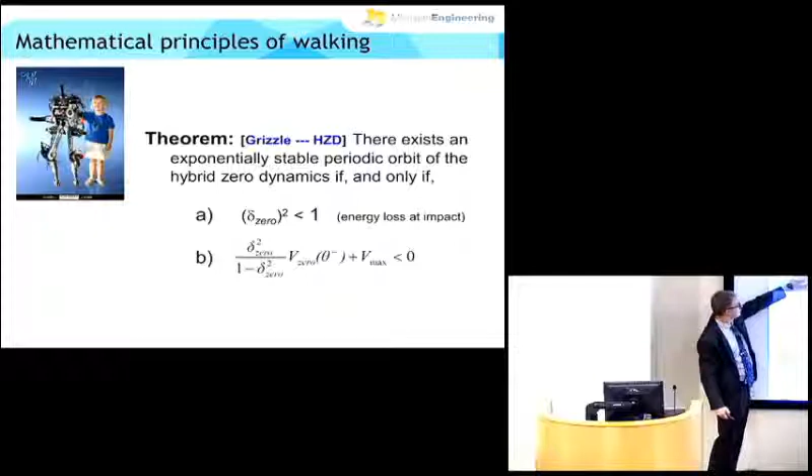That's the big thing, you know. This is just one of the simple early theorems, talking about energy loss and energy gain over the orbit and how those things interact for stability. It was developed for Rabbit, okay? But it basically worked for Mabel. And, of course, this is not a biped, so maybe that one should still expect to work. But I never thought about that, okay? That's much more complicated.

It's got a human attached to it, okay? But Bobby Gregg looked at it and said, hey, that should work. So let me show you what these guys have done. And I won't show you what Jim Schmiedeler's been doing at Notre Dame, but that's really nice, you should have him come talk to you. This is work Bobby did at the Rehabilitation Institute of Chicago, just up the road from you guys.

I didn't talk about some of the other competing techniques, but this one literally involves you deciding where to put the leg. If I'm wearing this prosthesis, I will decide where to put the leg, the prosthesis isn't going to decide, so that doesn't work. And this requires you to walk flat-footed. If I'm walking flat-footed, even with my jeans on, I don't look like everybody else, and I am definitely not happy with this prosthesis, because what you want to do is blend in with the crowd. As much as we want to be individualists, we don't want to be special in uncommon ways. So ZMP, no way. This is what Bobby got.

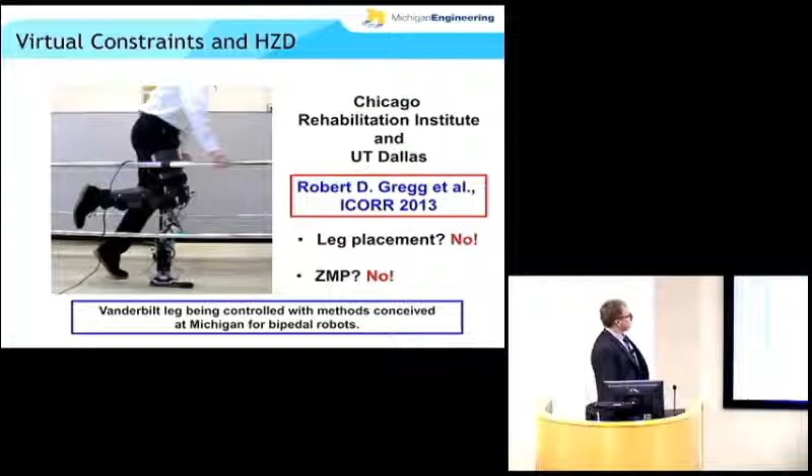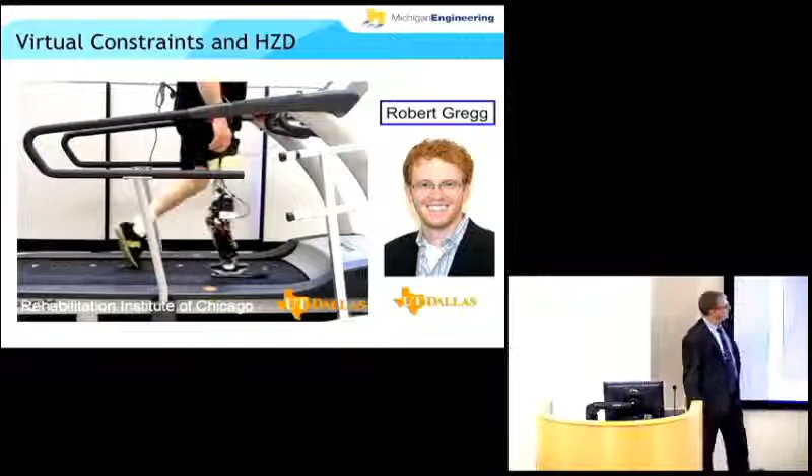It's his brilliance, but it's virtual constraints and zero dynamics inside that leg. Patients practiced 15 minutes before shooting the videos, and they're able to change speeds from 0.3 meters per second to 1.1 meters per second. He's got an active ankle and active knee on that, and they don't want to give it back. They've been walking very, very comfortably.

So go through it again really quick. It's natural walking.

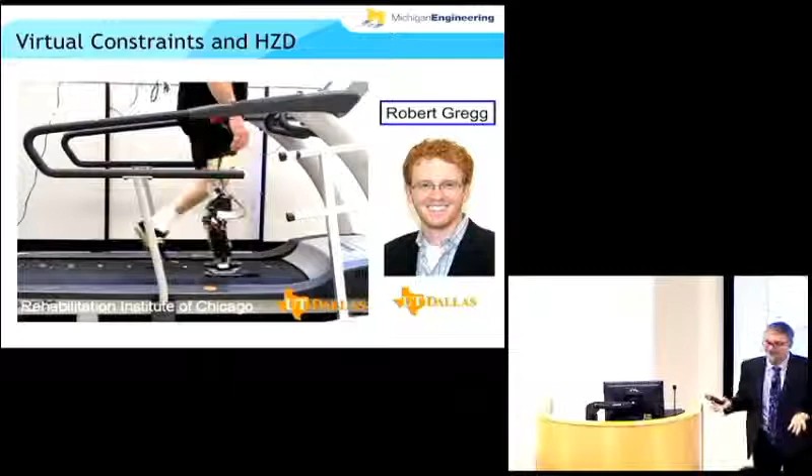I think this is really the beauty of writing things up abstractly. Earlier this morning, one of you was saying, well, I don't have any cool examples. No, but you've got cool math. Others will find the examples maybe, okay? You don't always have to do everything.

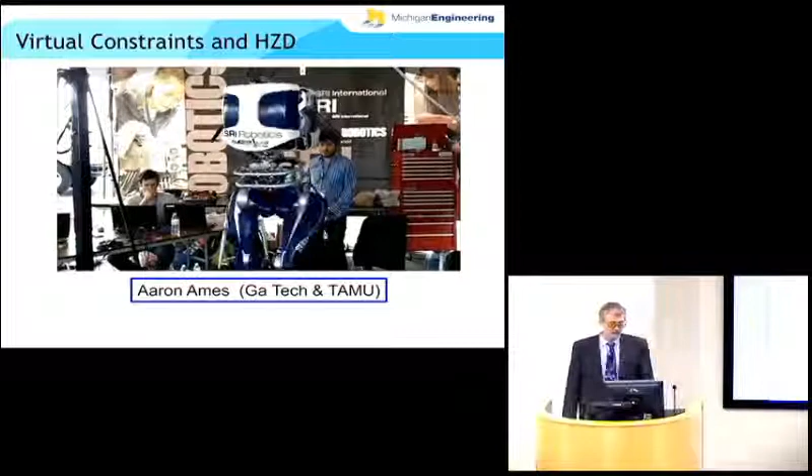I'm Aaron Ames. We're at the DARPA Robotics Challenge Finals, looking at the humanoid robot Durus. It's important to differentiate this robotic walking from a lot of the robotic walking seen throughout the competition. Everyone will notice the robots tend to hunch down and walk in a very slow and controlled fashion. It's very non-human-like to walk like this, and that's not what we want at the DARPA Robotics Challenge, where we go and do what we do, right?

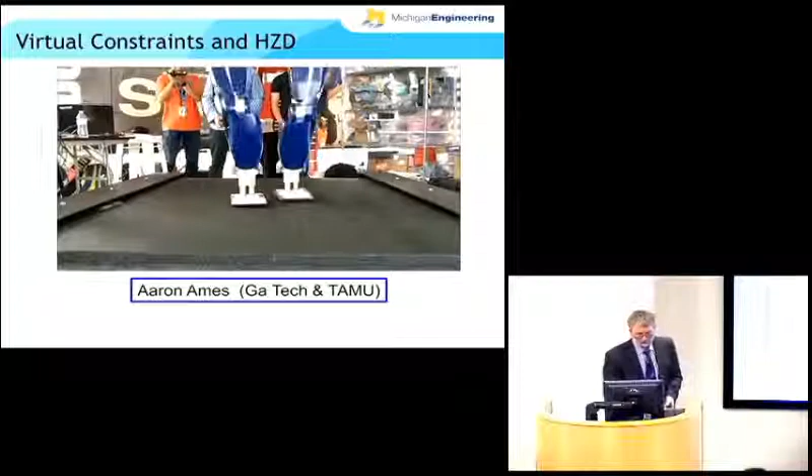So the difference here is we're no longer using these sort of pressure notions that these other algorithms build around. That's part of it for us, but really, this utilizes the whole dynamics of the robot, and utilizes it in a way that's formal and complete. So we can really leverage the...

So what Aaron is saying is that he's got hybrid zero dynamics going here. He's done all the optimization. But he didn't tell you, this robot was delivered to his lab 3 weeks before the competition.

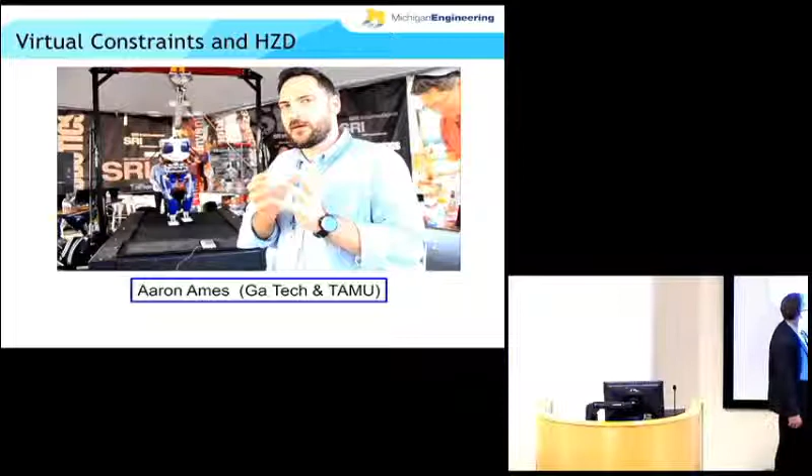I would have crumbled, okay? These guys know I can take a lot of stress, but there comes a certain point. That's where all this gray hair is from, it's not from the students, from the robots screwing up, okay? I don't have kids, okay? But it's young, courageous guys like Aaron that mean he got that robot walking in 3 weeks, and he showed up in California, and it walked 7 hours a day on a single battery charge, okay?

So that's when you get your math right, and I'll stop there. Thank you.